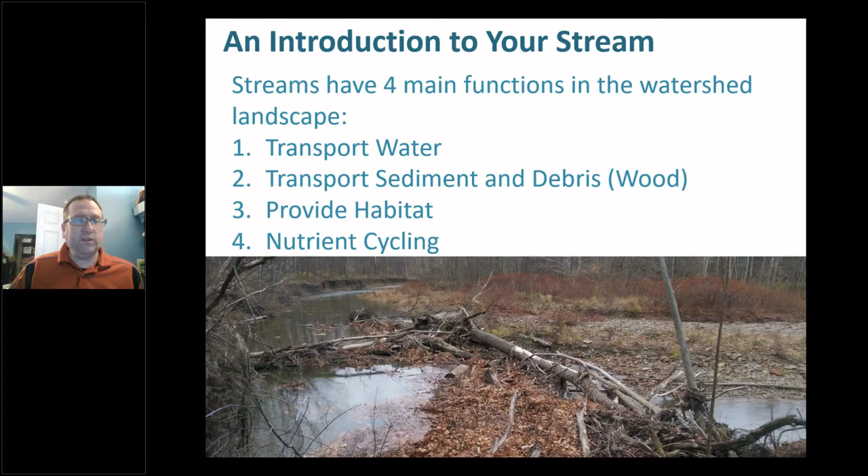So just some terminology so we all know we're talking about the same things when we're talking about our streams, to get us on the same page. The riffle is the shallow portion of the stream. It's usually where you'll find the bigger pieces in that stream channel, the bigger rocks. A lot of times those will be cobbles or boulders, and it'll look like a rapids sometimes.

Now, not always. In smaller streams, it might not look that way. It just might be the part where the stream water is flowing a little faster. But in larger streams that have these larger boulders and larger rocks, it will look like the classic rapids. You'll see standing waves sometimes when you get a lot of rain.

The pool is what it sounds like. It's the deep portion of the stream channel. It's usually slower flowing and has a smaller substrate, or smaller pieces. So think sand, silt, clay, things like that, on the bottom of the stream channel, on the stream bed in those pools.

A bar, when we're talking about a bar, you could have drinks there, but for the most part, when we're talking about stream systems, we're talking about a point bar, which is where you have a bend in the river. It's on the inside of that curve of the river. It's where sediment is deposited during higher flows, but lower velocity during those higher flows.

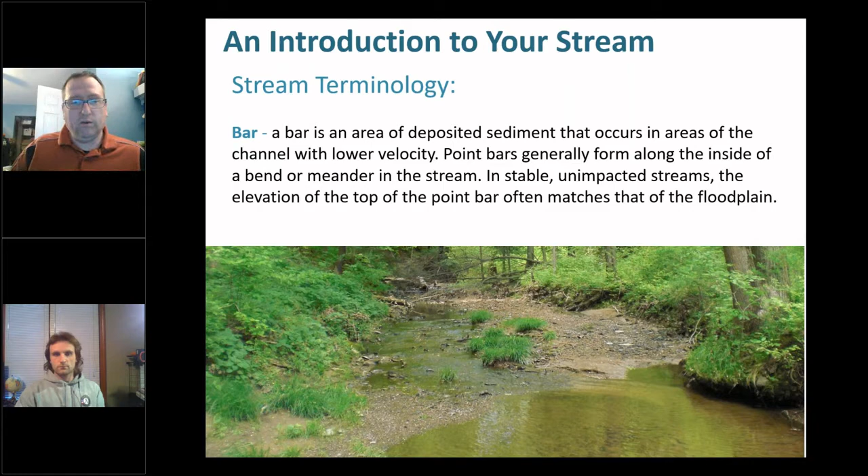So the floodplain, you heard me mention this previously, is the generally flat area next to the stream. It's where the water from the stream can spread out during a storm, during a flood. We've come to understand, especially in urban and suburban systems, that floodplains are extremely important, not just for storing flood water, but they dissipate energy. Moving water is energy, and it gives you a chance to dissipate that energy.

It provides an area where you get a lot of plant growth, a lot of nutrient uptake. And really, when a stream loses access to its floodplain, which usually happens either by downcutting or by filling of the floodplain or construction there, you lose a lot of function and a lot of stability in the stream system. So floodplains are really important, and we're trying to protect and restore those wherever we have the opportunity to do so.

So basically, healthy streams have riffles and pools and are connected to their floodplains. A lot of times in impacted or urbanized stream channels, we won't have this diversity of habitats within the stream system. There'll be maybe a really short riffle and then a really shallow pool, and it's all kind of the same, almost just a glide through there. So there won't be a lot of change. It'll just be a homogeneous channel.

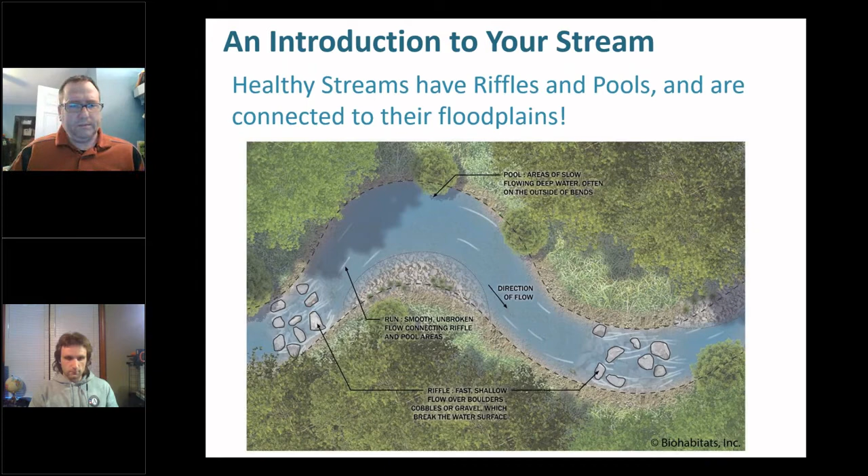And that's not good habitat, and it's also a sign, in our area anyway, in Northeast Ohio, of a system that's really not very stable. So there are many things that contribute to a stream channel's size, shape, and stability. Some of these are really intuitive and some are less so, but basically, what's the rainfall like in the area? How much rain do you get?

What's the drainage area? So how much land is contributing the rainfall it receives to that stream channel? What's that land cover like? We'll talk about this a little bit more, but is it forested? Is it a residential subdivision? Is it a commercial area? Is it agricultural area? What's the slope of the system? Is it really a steep valley or channel, or is it a lot more flat and shallow?

What kind of sediment and debris are in the stream system? Is it an area where you have big chunks of sandstone in there, or is it mostly little shale pieces? So how much roughness that can affect the velocity of the water. And then physical constraints like bedrock. So a lot of times we've seen where streams erode down to the layer of bedrock, and then they really start getting the stream bank erosion going because they can't cut through the bedrock as much, and they start really wiggling around, if you will.

Trees, and then more man-made obstacles or constraints like bridges, culverts, dams, retaining walls, things like that. These all impact the stream channel size, shape, stability, and overall health, and really how resilient they might be to changes in the system.

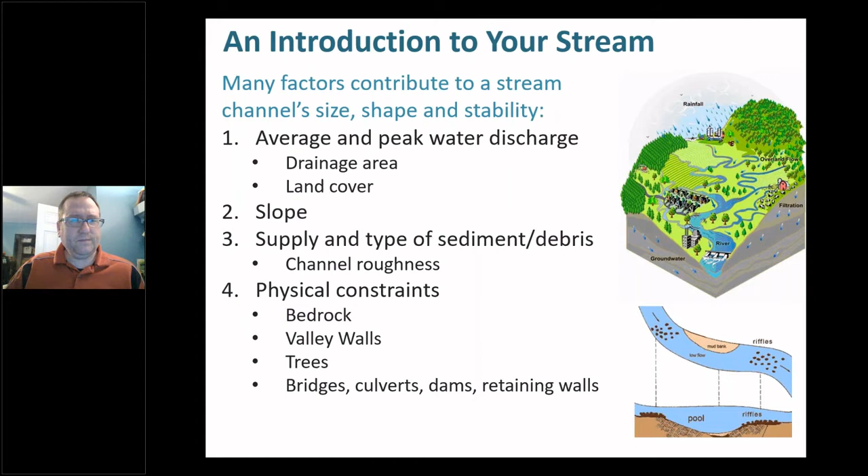So the one thing that I would say characterizes a lot of Northeast Ohio, certainly Cuyahoga County, and then the surrounding counties, is advancing urbanization and suburbanization. When we're talking about that, we're really talking about what the land surface is like. So is it pervious, where the rain can infiltrate into the ground, or impervious, where the rain will hit the surface like concrete, for instance, and run off to a storm sewer, storm drain, or the nearest creek or river. So in the natural landscapes, these tend to soak this in. They soak up the rain, to spread it out, slow it down, and soak it in.

Whereas in the developed landscape, we're trying to get the water off the landscape as quickly as possible. And really, throughout a lot of Northeast Ohio, when our communities were developing, say in the mid 20th century to late 20th century, the dominant paradigm in municipal engineering was to get the water off the landscape as quickly as possible. And we were very efficient at that. But that led to downstream consequences, which we'll talk about here in a minute.

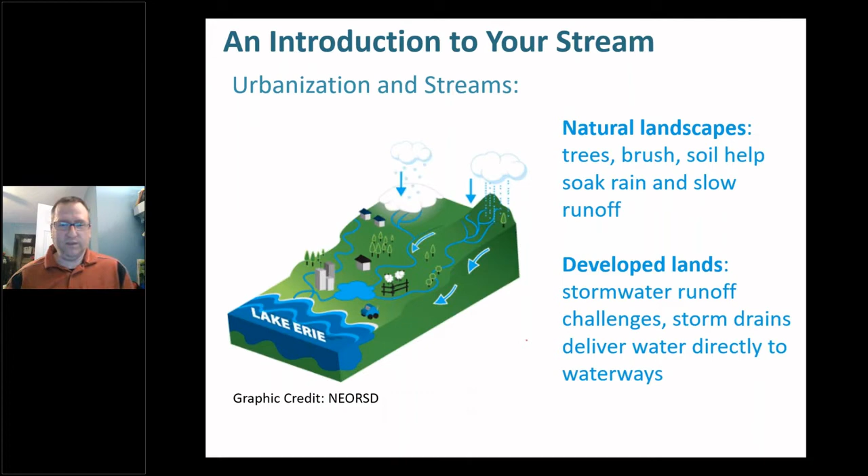So continuing on with this slide, and this is a very busy slide. I'm not going to talk through all of this, but basically in an urbanized system, you get more water into the stream system faster than you do under natural conditions. So one thing I like to talk about to illustrate this point is, if you're like me, you go for a hike in the metro parks or something, in the woods, and it starts to rain. Especially in the spring and summer, you don't feel that rain right away. It could be raining for several minutes before you start feeling any drops because those trees are intercepting that rainfall.

It really rains for a while, and that rainfall slowly makes its way down through the layers of the forest, down from the canopy, down through the underbrush. It's absorbed by the leaf layer on the forest floor. It slowly soaks into the ground. It rains really, really hard for a while, and then you'll start to get the runoff after most of it's already been absorbed by the forest system. And the nearby stream will slowly rise, spread out onto its floodplain if it gets enough rain, and then slowly recede.

Now, on the other hand, I've also been in the parking lot at like Giant Eagle or Home Depot when it starts to rain. And in contrast, you get soaked right away. You're sloshing through it ankle deep. And all that water, instead of being intercepted by the forest and soaked into the ground, is now just being directed to the nearest storm drain as quickly as possible. And if it's in a newer development, a newer commercial area, it's hopefully going to a detention basin or retention pond to be held and released slowly.

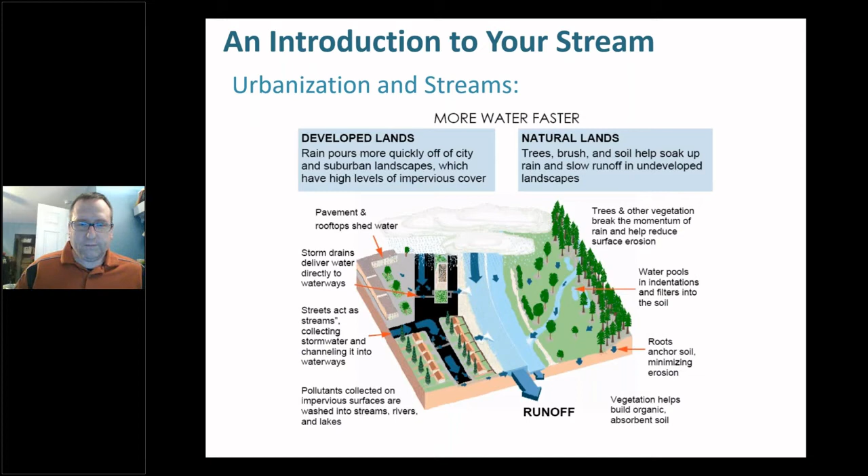Another factor we're fighting against, not just the amount of impervious surface, are changing stream discharge patterns related to climate change and the amount of rain we're getting, and not just the amount, but we're getting it in more intense events. So this is based on a flow gauge in the Rocky River that's been in use since 1923. Obviously, I did this a few years ago, so it's been a few more years since that.

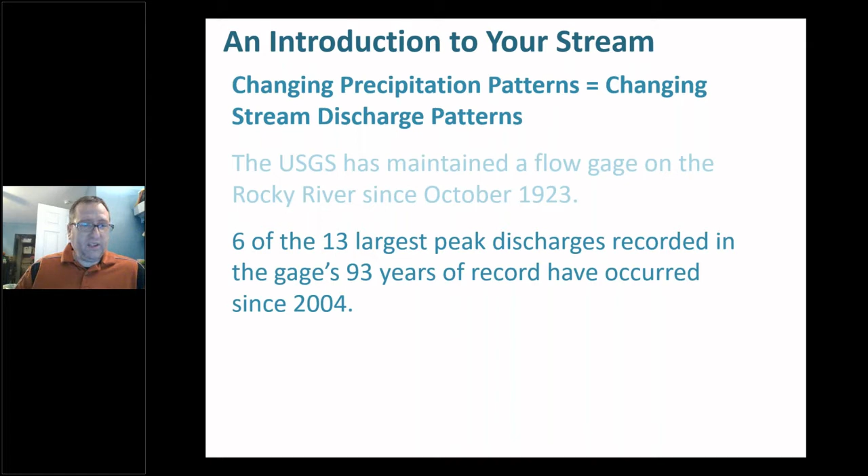But 6 of the 13 largest peak discharges at the time, so this was in 2016, had been recorded since 2004, and 4 of those 6 large ones had been since 2011. So basically, 4 of the largest discharges recorded in the 93-year history of this system have been since 2011. We actually have another higher one on there we could add for 2016, I believe.

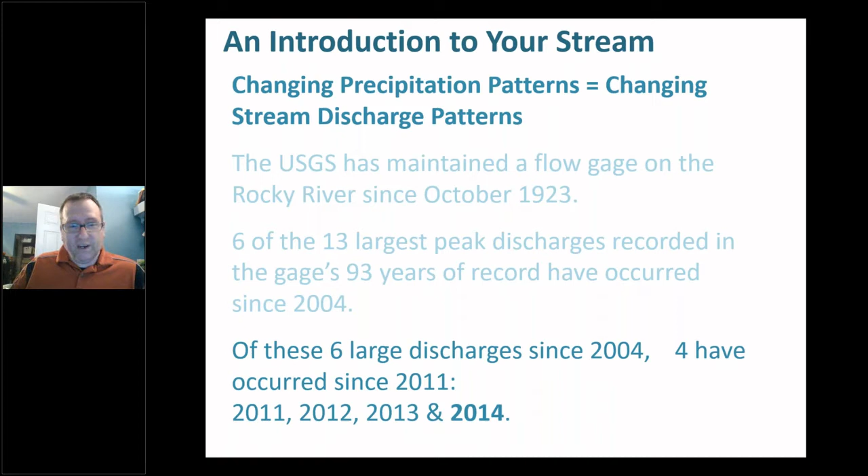So we really have seen, it's not just people saying, oh, we've had 400-year storms in the last 3 years. It's not just stories and people thinking, man, we seem to be getting a lot of rain. We are getting more rain, more intense rainfall, and it is being transmitted to our streams. We are getting these higher stream flows during these storm events.

And this is just an illustration of how this works. On the left, you see a diagram of what we call the channel evolution model. So as you're increasing the amount of water that's getting into the stream channel, either because of more impervious surfaces in the watershed or increased stream flow due to climate change, the stream erodes down, reaches bedrock or another hard surface, and then starts to spread out, and you get this erosion. Eventually, it will make a stable channel.

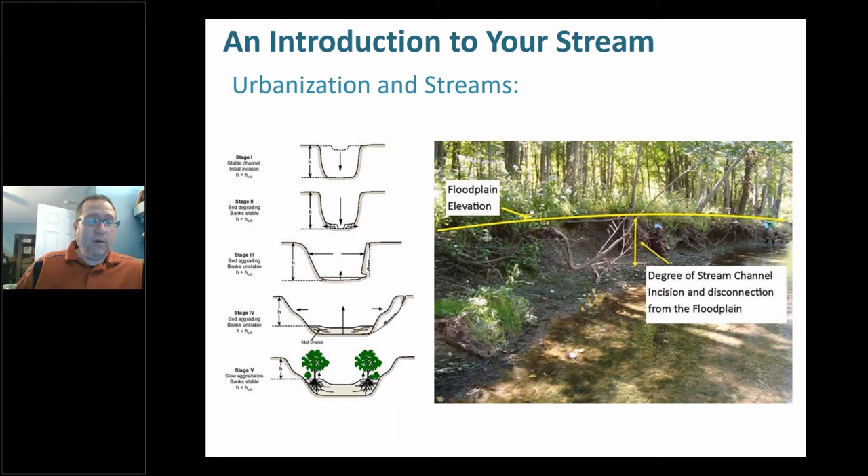Nature's always searching, these streams are searching for equilibrium. So they'll find ways to do this, but this usually takes on the order of decades. And then also you can see it's now spread out. So if we have any infrastructure or other things, yards that we don't want to lose next to the stream channel, if we wait for this to take its course, you're going to lose a lot of that on the sides. This is a natural process. It's just really accelerated by the changes we made on the landscape and the changing weather patterns.

So you can see in this illustration, the yellow line there marks the elevation of the floodplain, and you can see how far the stream channel has downcut in this instance. And this is not even the worst of the ones we see. This is pretty standard, I would say. This section of the stream is probably draining about 8 or so square miles. And you can see it's trying to form almost a point bar on the inside of this.

And you can see how much, there's several feet. Elizabeth down here for scale, she's about 5.5 feet tall, and so you can see it's probably about a 4-foot difference there, at least, between the floodplain and where the top of that point bar would be. So that stream, realistically, has to have a huge storm, a huge stream flow to be able to get out onto the floodplain and get the benefits of storing that floodwater in the floodplain, dissipating that energy.

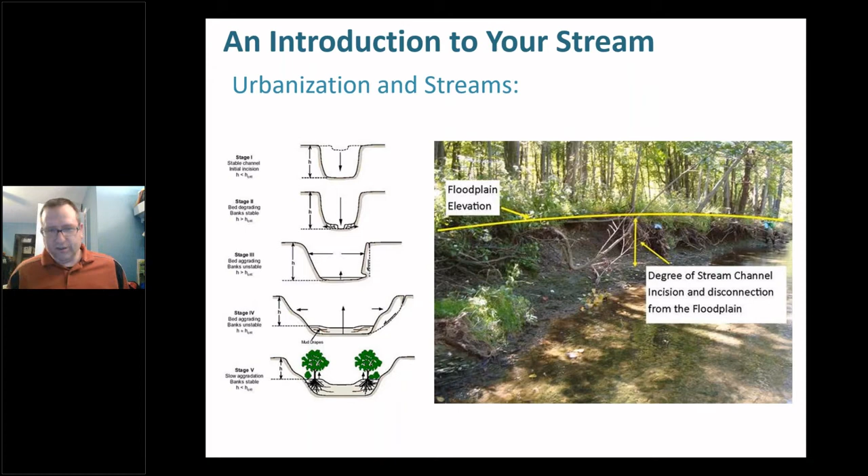So now we're going to get into some of the legal aspects of your rights and responsibilities as a streamside property owner. We will have a poll here, but before we get into this section, I just want to preface, I'm not a lawyer. I don't play a lawyer on TV. This is just how the information has been presented to us as far as how water law and drainage law works in the state of Ohio.

So I'm going to launch another poll here. So if a stream flows through your property, do you own the water? Just want to see what people think here. So your options are yes, no, or it depends. I'll give you a hedge there, I guess. So if you want to go ahead and respond to that poll, I like to see what people's thoughts on this are as we get into this.

So about a quarter of the people have voted. Give it another 10 or 15 seconds here.

All right, we'll have a couple polls here when we're going through this section of it, just to get an idea of where people are with this. So I've had 80% votes. I'm going to go ahead and close the poll, share the results. So 93% said no, and 7% said it depends.

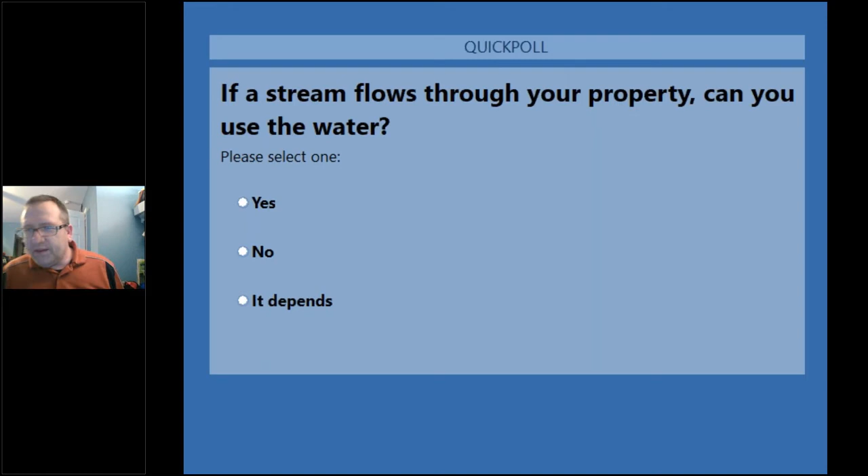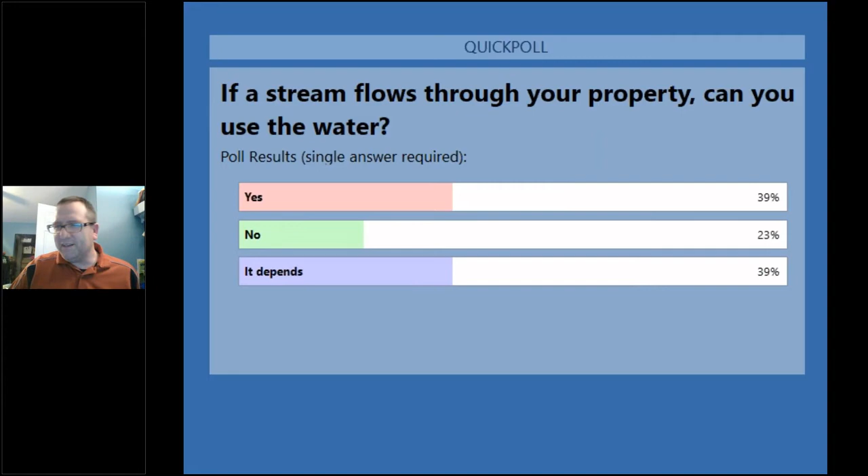All right. Looks like most people voted here so far, so I'll close the poll and share the results. So 39% said yes, 23% said no, and 39% said it depends. We had a tie between yes and it depends.

And the answer for this is yes, you can. You have what are called riparian rights. So that means you can divert the water. You can put a pump in there and use the water to irrigate a farm field, or you can use it to pump water out to fill your swimming pool if you wanted. I don't think you'd want to do that, but you're allowed to use that water. You can divert that water for use on your property.

Now there are some caveats to that. There are some limits. It depends on where you are, like if you're in the Lake Erie watershed and how the stream is classified and those kind of things. But generally, you don't have to worry about it unless you're pumping more than about 100,000 gallons a day out of the stream. At that point, you start to get into potentially needing some permits depending on what you're using it for, and like I said, how your stream is classified.

And also, and we'll talk about this a little bit here later, if you would pump all this water out of the stream, you would potentially cause some other environmental issues. So then you might run into some trouble there. So obviously it's based on what the stream can handle. And also with those riparian rights, you can divert that flow to use in other places on your property. But you do run into some issues.

So if you would harm your downstream neighbors, and not just harm. The way that this is defined in Ohio goes all the way back to English common law. But the way this works in Ohio is you can even cause harm by how you divert the flow of the water, but you can't cause what the courts have determined is unreasonable harm. So an unreasonable harm, unfortunately, can only be determined by a court, because that's how it's set up.

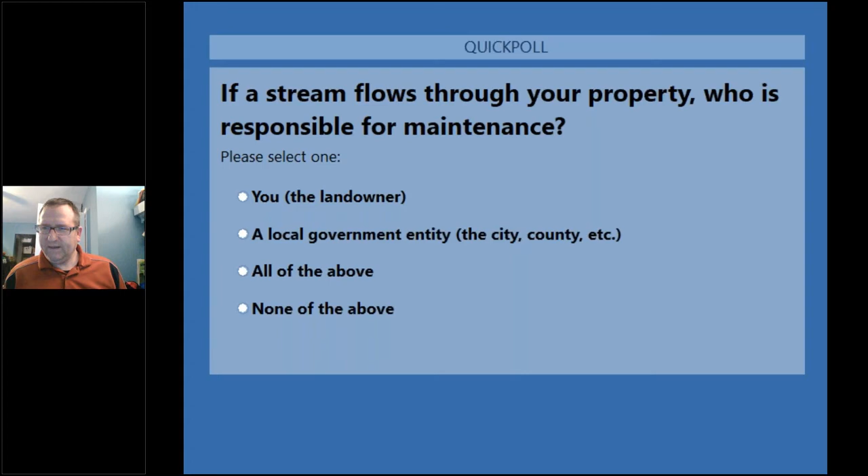All right, getting close to everybody having voted here. I'll go ahead and close that one out and share the results. So 63% of people said that the landowner is responsible. Only 6% said a local government entity such as the city or county is responsible, and 25% said all of the above, and 6% said none of the above.

Now, there are situations where sometimes a local government entity will come in if it's impacting public infrastructure and make some repairs or clean out a debris jam. Also, certain areas within the Northeast Ohio Regional Sewer District's stormwater management program. If you're within that service area, there are certain areas where they'll come and do maintenance. Basically, they'll do an assessment to see A, if they think it's needed, and B, how much it's impacting. Either is it going to erode into a house or cause a road to flood, things like that, or block a culvert. But generally speaking, you are going to be responsible.

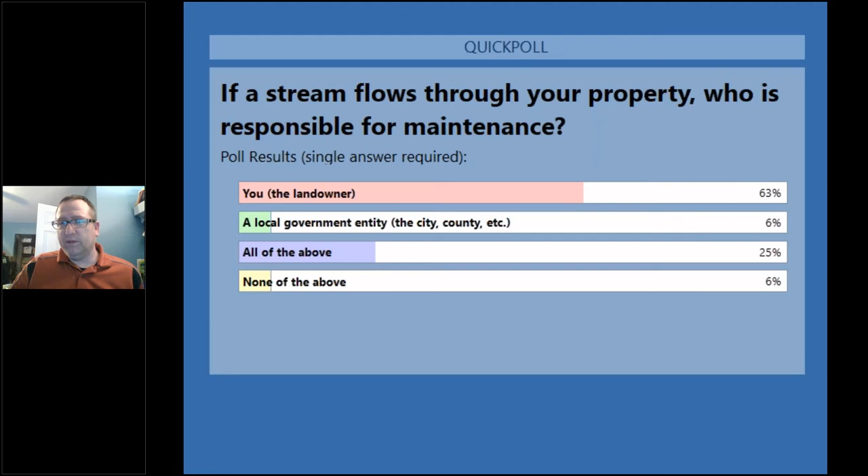I don't know of any instances of them actually enforcing that, but because they have it on the books, it leads me to believe there could be some other communities that have a similar ordinance in place. I'm gonna hide those results. Okay, yeah, so as I mentioned before, you don't have to do that.

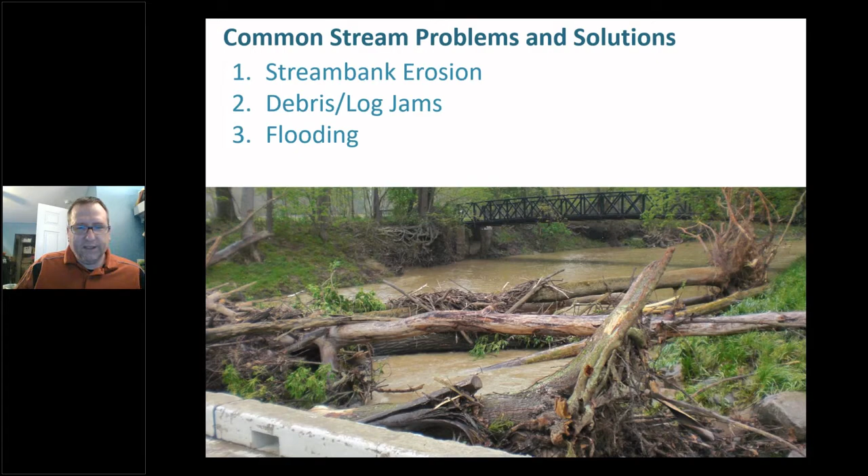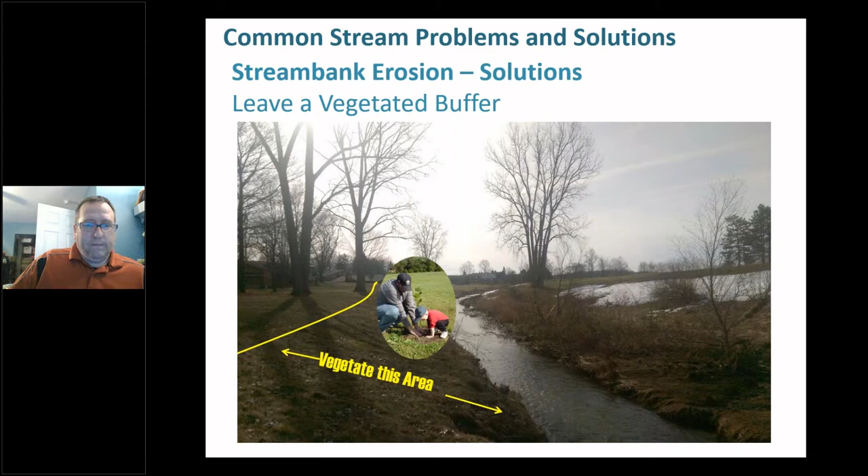But the most important part: these wildflowers, these native plants, will have a lot deeper root system than that turf grass, and a lot thicker root system, and that will also provide benefits. The woody root systems are going to be a lot stronger in resisting that erosion, but you'll still get a lot of benefit just by stopping mowing up to the edge.

So it's not just getting into the stream system. I mentioned how, in the process of decomposing, the grass clippings and leaves can really suck oxygen out of the water. But also, when you pile up all these grass clippings, you're smothering out and killing any natural vegetation that would be growing there that would then be helping to stabilize the bank. So it's kind of a double whammy. You're causing some water quality problems, and then you're also basically killing off the vegetation that would be helping you stop stream bank erosion.

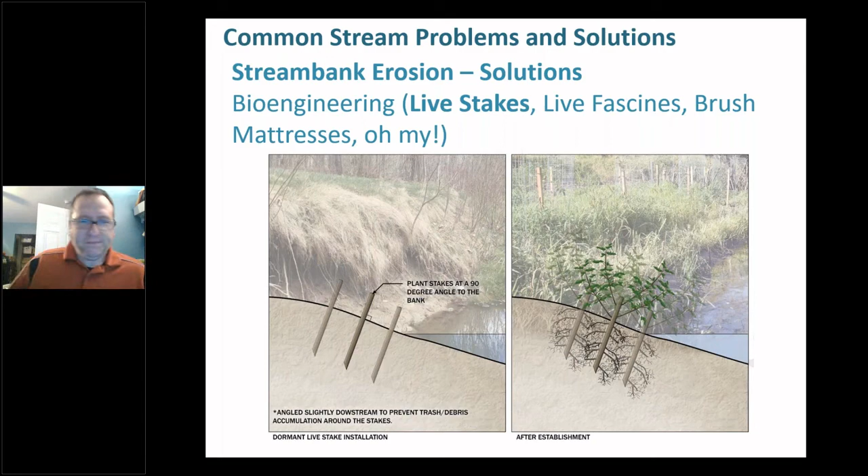So you can see some examples of these here. Once they've been installed and start to grow... you really want to install them as close to the water's edge as you can, because they need to be accessing the water table, which will be the elevation basically of the stream at base flow. So you want to put these in right at the stream's edge. And you can do a couple rows of them, spread them out when you're installing these.

And for those of you who are picking up the live stakes, we'll have more instructions for you. This is also a good time for me to mention, there are some handouts available here for this presentation. One of those is on live stake installation. There's a couple more on stream ownership, kind of the legal aspects, and then also some sections on just living next to a stream.

The other thing, when you're installing these, sometimes if you're lucky, you'll be able to just push it straight into the stream bank, but sometimes there's rocks, or the soil's harder, and you have to make a pilot hole with rebar. Or if you don't have rebar, you can take one of your stakes, one of the bigger ones, and designate that as what you're using to make a pilot hole, and you just use a hammer to hammer that in and make the pilot hole to install that live stake.

And you want to install them at least halfway. So if you have a 2-foot live stake, you want to get at least a foot of it into the soil, so half to 2/3 of that. So a foot to 16 inches of that 2-foot live stake you'd want to be into the soil.

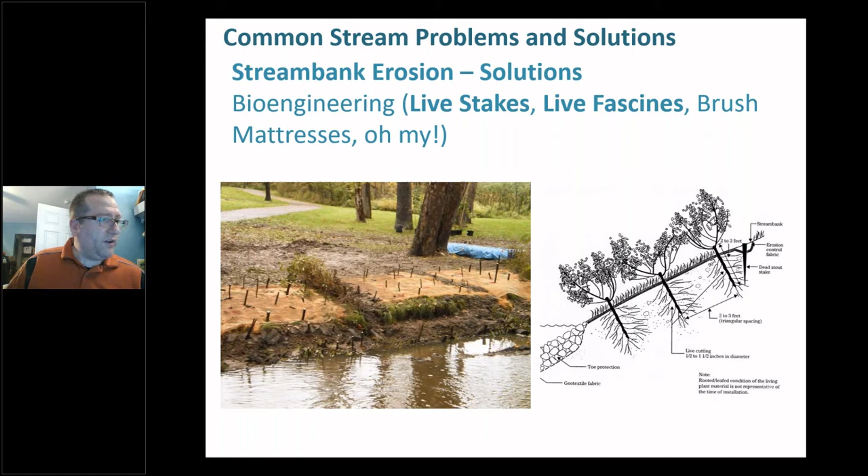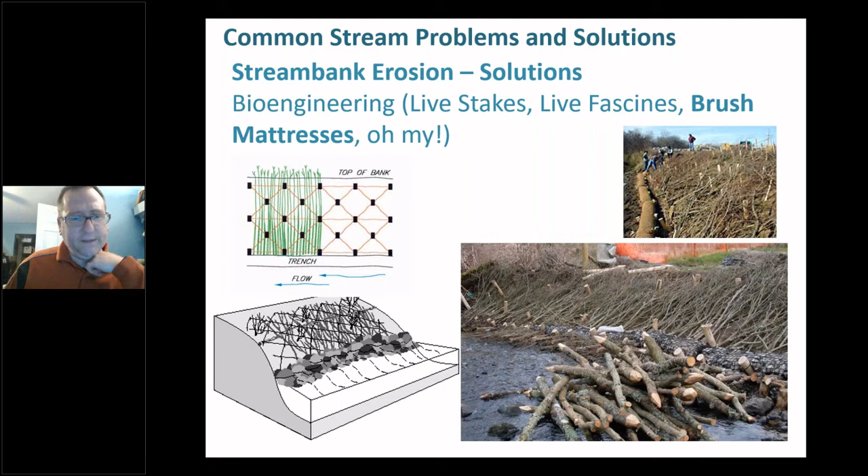A way to think of the bankfull bench is as a mini floodplain. It gives the water a chance to spread out at higher flows. It's not as wide as a natural floodplain might be, but it's better than what was next to the stream channel previously. And for most storm events, you'll be able to get some of that water up onto that mini floodplain, your bankfull bench, and get some of those benefits of floodplain storage and dissipating the energy of the flowing water. And obviously in this situation, we come back and plant that too with shrubs, trees, those kinds of things.

So another issue beyond stream bank erosion we deal with is debris and log jams. So this causes a loss of conveyance. You could get upstream flooding and property damage from that. This can be caused, like I said, by debris or logs just getting jammed in the stream channel. Sediment, especially at bridges and culverts, can also cause some of these issues.

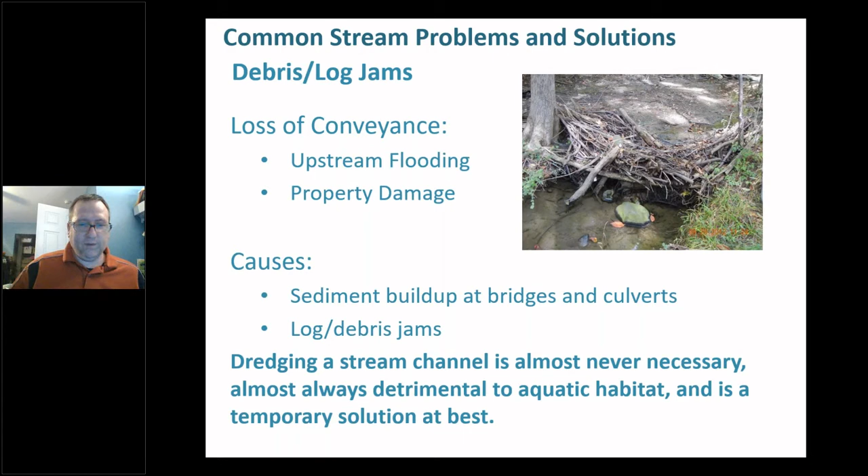Usually when people come in and do that, you're clearing out vegetation, you're loosening up the soil in the stream banks, and usually you're digging the stream channel deeper, so you're eliminating access to the floodplain that would benefit the stream channel and its stability. So some solutions.

First, most times these debris and log jams are really healthy for the stream system. They add carbon to the system, which helps with nutrient cycling. Also, because they slow down the water, you get sediment deposited behind them. And so it can actually help raise the stream bed elevation and reconnect to the floodplain. A lot of times when we do stream restoration projects, we're kind of mimicking these debris jams and log jams and this large woody debris in the stream channel.

And so unless it's really significantly impeding flow to the point that it's threatening infrastructure, it's going to flood your house, something like that, they're great to leave in place. Or if it's blocking it to a point where it's going to start eroding around it into infrastructure. But if infrastructure is not threatened, usually they're really healthy for the stream system.

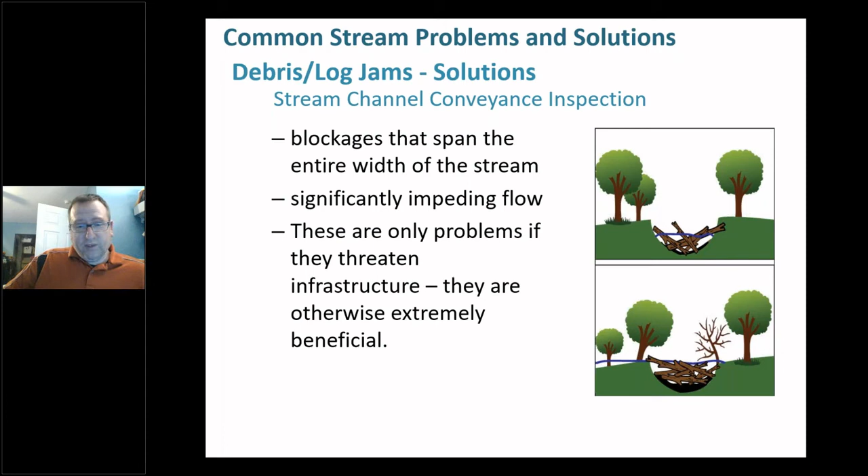So just some general guidelines. If you are removing this debris, you want to dispose of it away from the stream. Almost never remove live vegetation. You really just want to take out dead stuff and loose debris. Always leave the stumps and roots. They really help anchor the stream channel. If you're using equipment, don't get in the stream channel. Use a reach from outside the stream channel. Obviously, you don't want to do this during a storm, so during low flow.

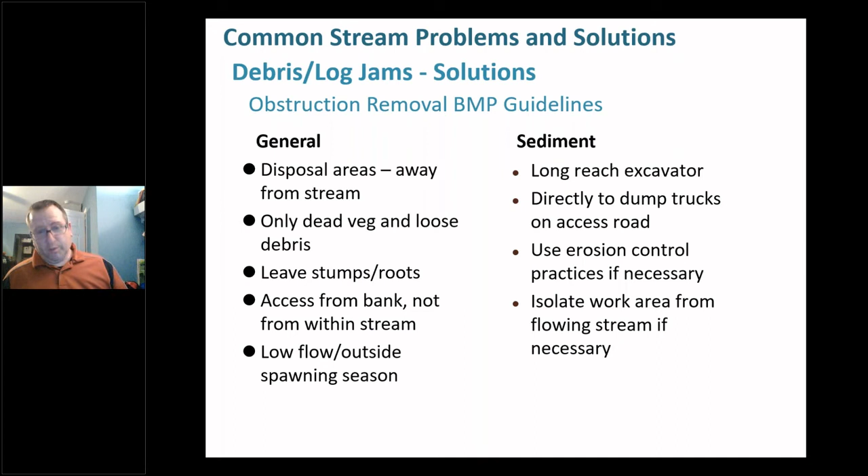Now flooding, this is one where it's very unlikely that if you're having flooding on your property, something you do on your property, aside from moving whatever is being impacted, will help. So if your driveway is flooding, you know, moving your driveway or something like that. Really this is not something where something you do on your property is going to be able to change that.

But it is something where, throughout the watershed, if we can do these practices where we are restoring floodplains, restoring access to floodplains, adding forested corridors along stream channels that will absorb some of this water and then provide woody debris that can help cause some of these smaller debris jams that can help build up the stream bed some more and create better floodplain access. These are things where we can start to solve some flooding issues.

And a lot of times, if your property's constantly being flooded by a stream, there's different kinds of flooding too. So there's stream flooding, which is kind of what we're talking about here. But a lot of times people might have basement flooding, and that's usually different kinds of issues related to the storm sewer system or the drains on your own property. But when there's stream flooding, it really takes a lot of work upstream to be able to change the flow of the water, how it's moving through the stream system.